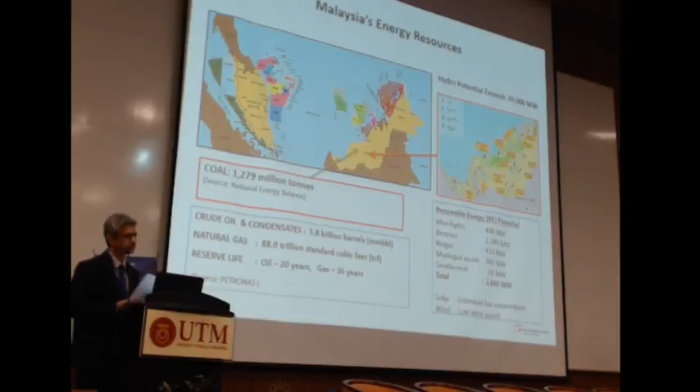So basically, as I will show at the beginning of my presentation, this shows our blessing, hopefully not a curse, that we are quite blessed with energy resources, of course mostly fossil fuel based resources. Coal, about 1,279 million tons, mostly in Sarawak and some in Sabah. At the rate of our coal consumption in the coal sector at the moment, maybe it can last over 40 years or so. Of course, the coal is low quality, and located in remote areas in Sarawak, and because of that we really use very little of our coal. Most of our coal is imported.

And then we have, of course, crude oil and natural gas, and if you look at the reserve life, it's about 20 years for oil and 36 years for gas. And we have a substantial reserve for hydro, in terms of hydro potential exceeding 20,000 megawatts mostly in Sarawak, and I think Sarawak is really harnessing the hydro to supply power to their population and to spur the development of the Sarawak economy, as we all know, based on the SCORE platform, sustainable energy-based development in the Samalaju area.

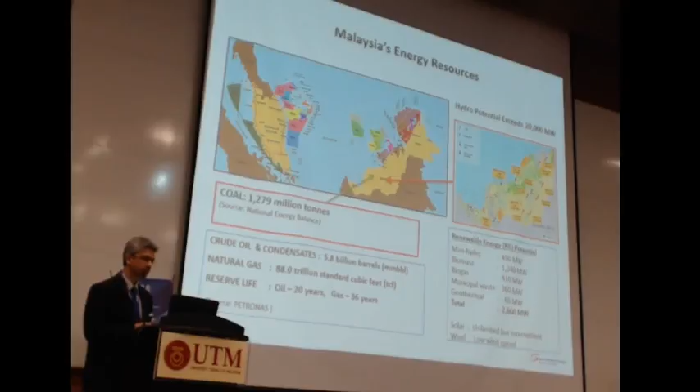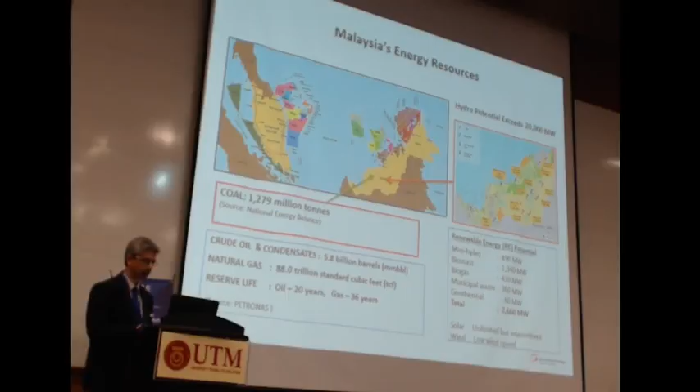Of course, we have not much wind resource because of our location in the equatorial belt, maybe a bit in the northern part of Sabah. So these are some of our resources available to us in trying to help us meet our energy demand. Of course, ocean energy is not in the list yet, but maybe we can add to that list after OTEC comes out with firm numbers on the resource capacity.

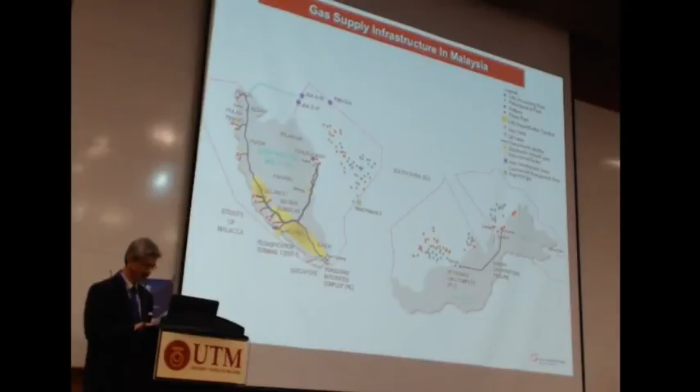Since the late or middle 80s, government has embarked on this program to harness our gas resources to develop our economy, and we have since then developed our supply infrastructure as shown on the map slide here, in West Malaysia and also East Malaysia.

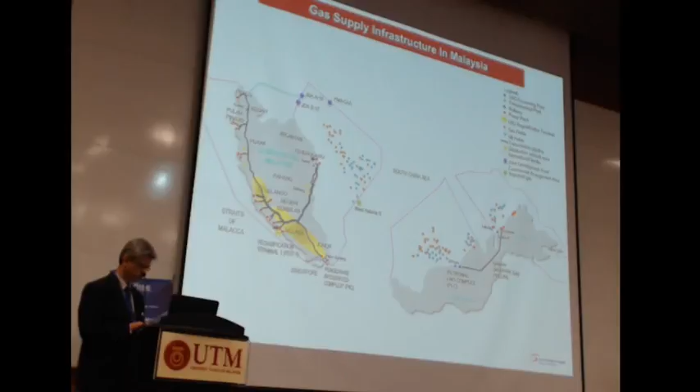And we export quite a bit of our gas as well, besides local consumption, as shown just now through our supply resources, supply infrastructure.

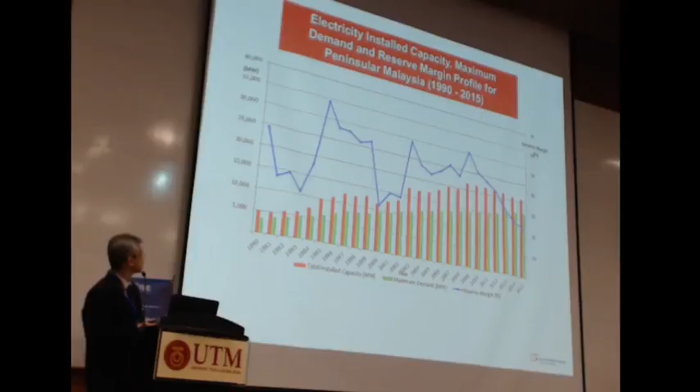The blue line shows our reserve margin. We need to manage the reserve margin so that we can prevent unforeseen interruptions in the supply of electricity through the reserve margin for planned and unplanned shutdown of the generators. But the problem is the higher the reserve margin is, it translates into more expensive system costs. So we try to optimize the reserve margin. And alhamdulillah, at the end of last year, our reserve margin was more or less optimum at about 24% or so, as compared to nearly 60% in 1995.

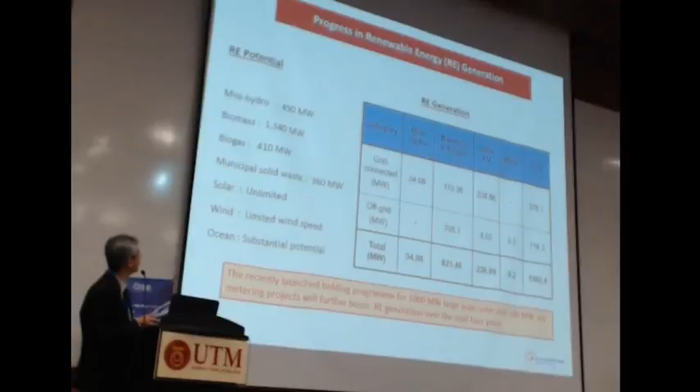As far as REs are concerned, if you look at the grid connected and the off-grid - I think there's a paper afterwards on this - we have mini hydros about 34 megawatts, biomass and biogas 110, solar about 228. So total grid connected is about 376 megawatts.

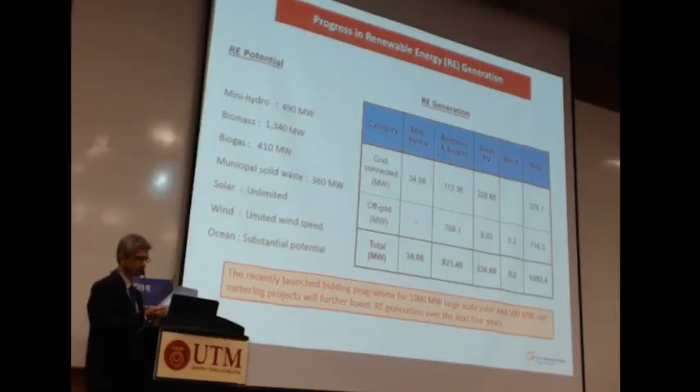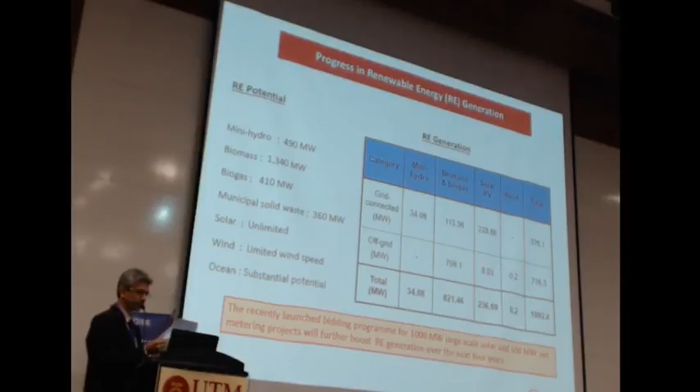Off grid, if you look at the palm oil mills for instance, about 700 plus megawatts being generated from biomass and biogas. We have solar about 8, and a bit of wind, about 0.2 - maybe they're no longer working now. Total about 716 megawatts. So all in all, total over 1,000 megawatts of RE generation.

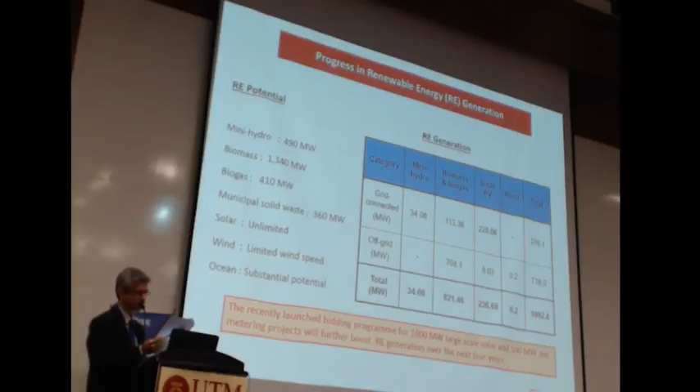Of course, I added the ocean potential at the bottom there. As Dr. Bakar has always said to me, we have substantial potential, and hopefully we can start harnessing it soon, spearheaded by UTM OTEC of course.

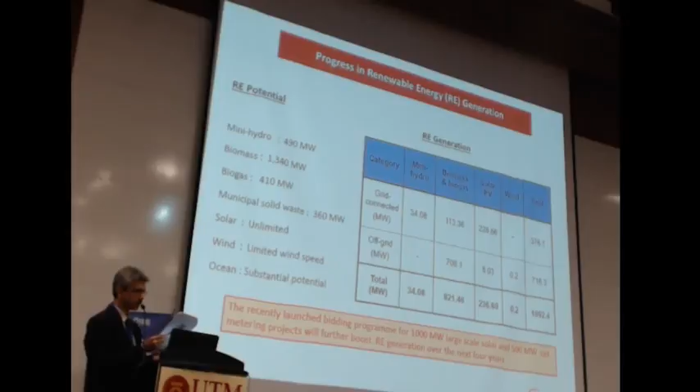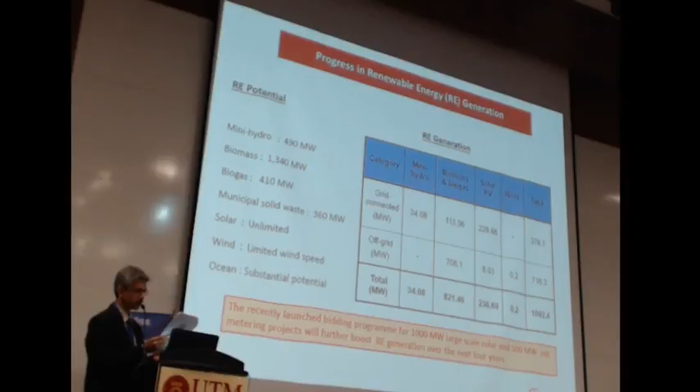But the good news is, as mentioned at the bottom, the recently launched bidding program for 1,000 megawatt plus large scale solar, and also 500 megawatt net metering projects, will further boost RE generation over the next 4 years.

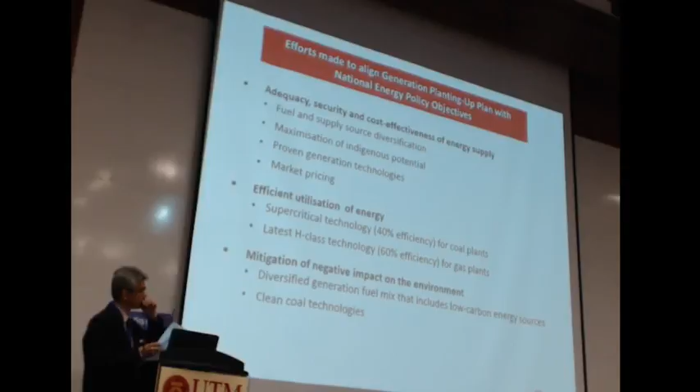So if you look at our historical mix trend as well as the option in the plan I presented, basically what we try to do is align the generation planting-up plan with national energy policy objectives. As you all know, we have basically 3 objectives. Firstly, to ensure adequacy, security and cost effectiveness of energy supply.

This we try to achieve through fuel and supply source diversification, maximization of indigenous potential, proven generation technologies, and going into a market pricing regime.

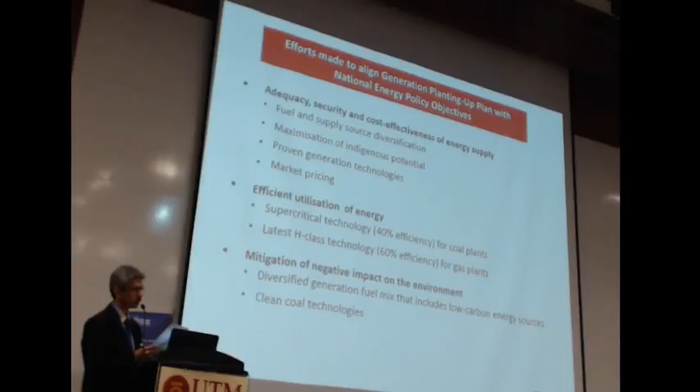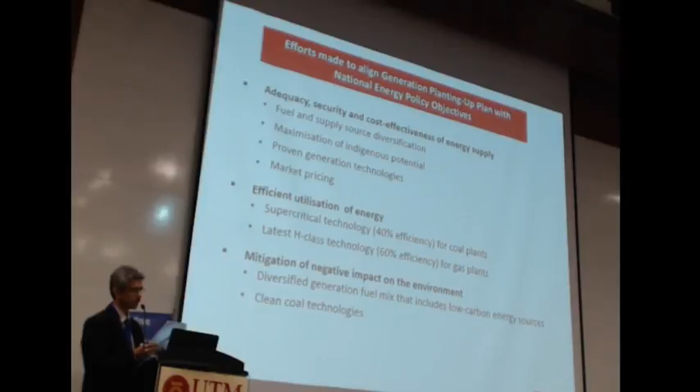Second objective, efficient utilization of energy. We try to include as many plants as possible that are state of the art in terms of efficiency, like supercritical technology, which can achieve 40% efficiency for coal plants, and the latest H-class technology, which can achieve 60% efficiency for gas plants.

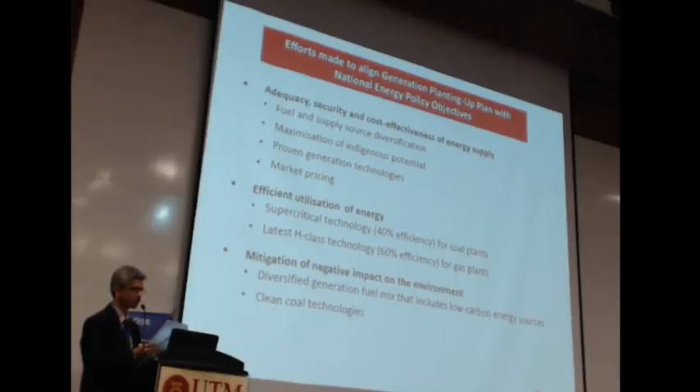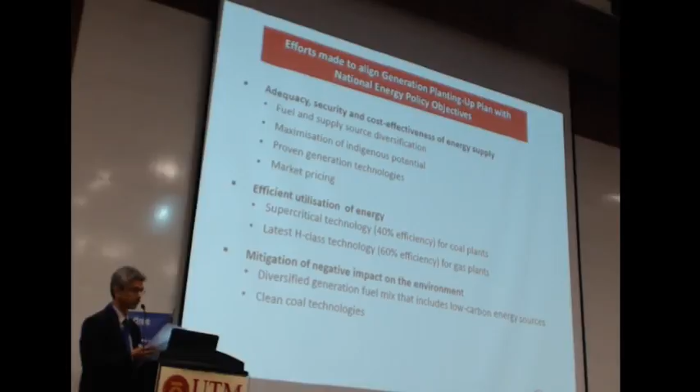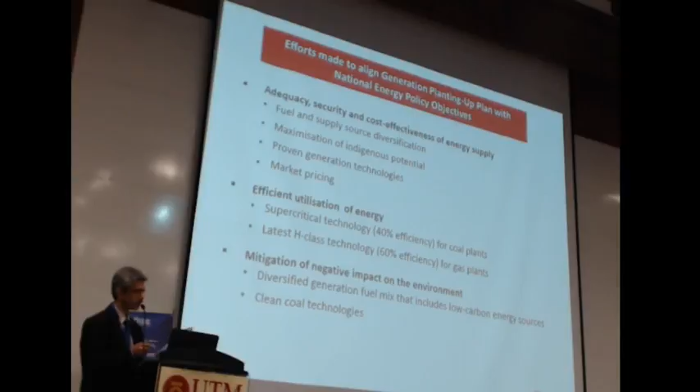We also strive to mitigate negative impact on the environment through diversified generation fuel mix that includes low carbon resources - of course not too successful - and we also include clean coal technologies. But the bottom line is basically we want to minimize system generation costs. So we have constraints here and there, and at the end of the day we really cannot go all out to satisfy any particular criteria as listed here.

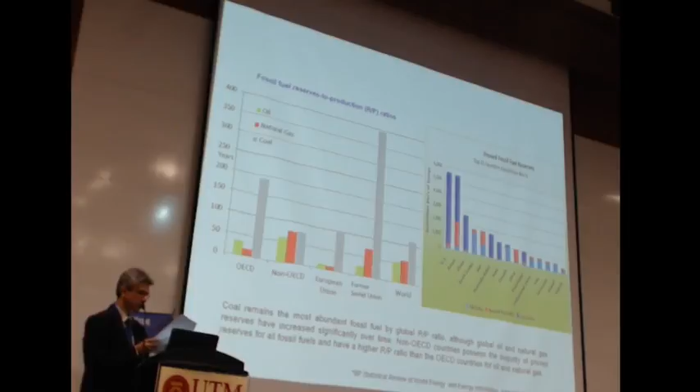Gas can last about 50 to 60 years, and oil about 50 years. Of course, this is conventional gas - it does not include the potential for shale gas. So if you include shale gas potential, the gas potential can exceed, maybe reach until 200 years or so. That's what they say.

So basically, the countries exporting energy, or rather producing energy, led by the US, Russia, China, Saudi Arabia - Malaysia is not in that list. That basically reflects the relative quantum of resources we have. But the geopolitical aspect has to be looked into when we decide what to do in the future.

One challenge we'll be facing is that securing more coal supply will be more challenging in the future. We are now importing about 20 million tonnes per year of coal for the power sector, but by 2040, or 2030, or maybe even 2025, we will be importing over 40 million tonnes, double that amount. We have to compete with other countries in South Asia and Asia to import coal, and this is going to be a big challenge.

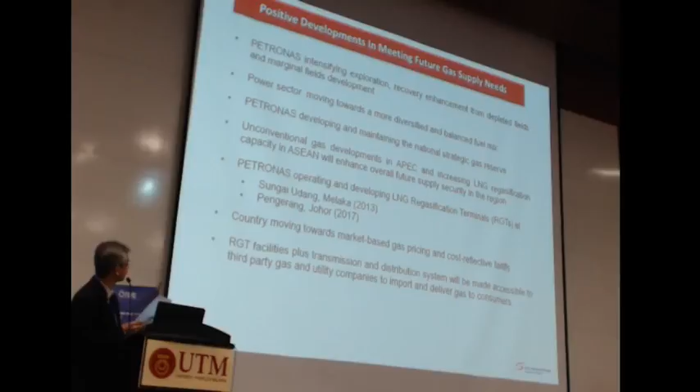But there are other positive developments for gas. Petronas has embarked on intensifying exploration, recovery, and enhancement from depleted fields and marginal fields. I shall not go through the full list, but on the slide there is the gas terminal we developed for Pengerang, to be commissioned in 2017. That will give us another option to import gas from the LNG market, and we are moving to market-based pricing.

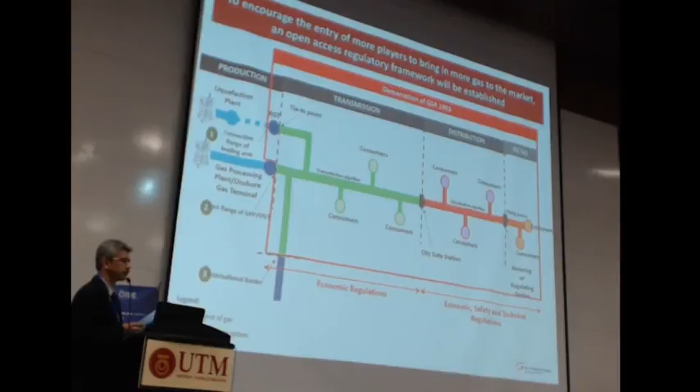In fact, the Parliament, Dewan Rakyat, has already approved our bill to embark on a third-party open access regulatory framework, enabling market participants other than Petronas and Gas Malaysia to bring in gas and use the infrastructure to supply gas to end users. This is a game changer for Peninsular Malaysia, where we now have more players who can make use of the infrastructure in place to import and supply more gas to meet demand.

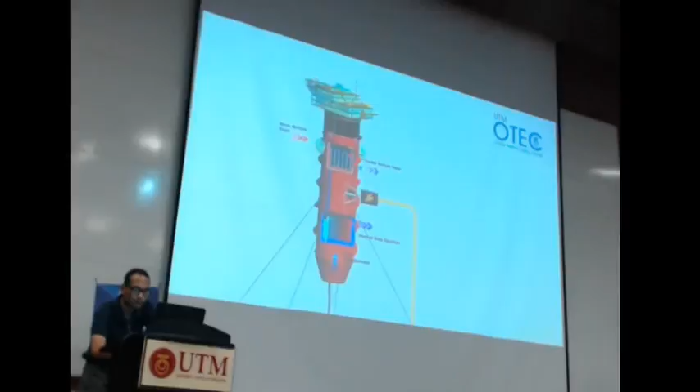The ocean offers the single largest opportunity for meeting our energy needs. 80% of the energy received from the sun is stored in the world's oceans. As long as the sun is there, we can harness the amount of heat stored in the upper layer of the ocean, ensuring our energy security. Ocean Thermal Energy Conversion, or OTEC, is the solution.

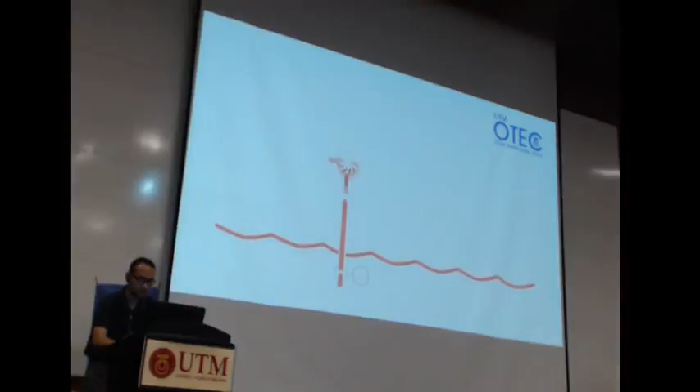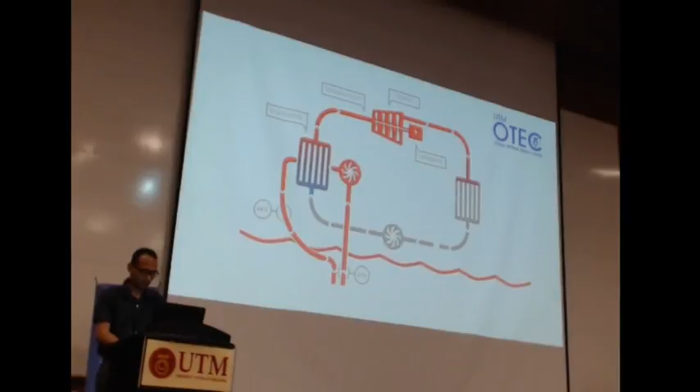OTEC works by processing the temperature difference between hot surface water and cold deep ocean water to produce energy. The process starts when warm surface water is used to boil a fluid, producing steam. The steam turns a turbine, generating electricity. Cold water from the ocean's depths condenses the steam back into liquid, completing the cycle. The advantage of OTEC is that it provides continuous, consistent baseload power.

There are many regions of the world that have OTEC resources, including Malaysia. We have discovered that we do have ocean thermal energy resources, especially in the deep waters of Sabah and Sarawak. UTM's Ocean Thermal Energy Center spearheads this initiative.

This center promotes not necessarily the research and development first, but our way of moving forward is to commercialize ocean thermal energy. Our main role is to promote private investment, and we will continue research to improve the existing technology.

OTEC offers various solutions with multiple applications. One of the energy carriers we are going to produce is hydrogen fuel, and hydrogen fuel will be the dominant energy carrier in the 21st century.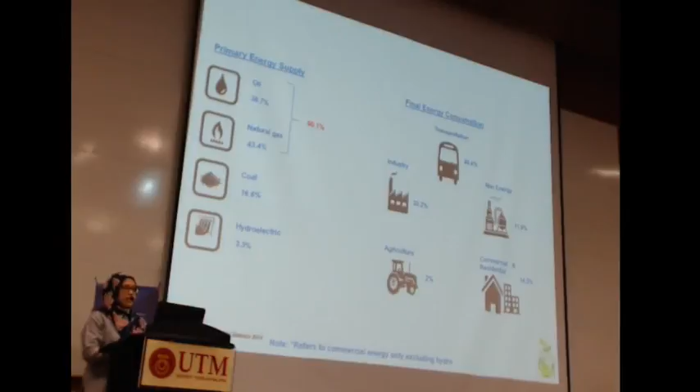I think Dr. Fauzi has elaborated at length in terms of information on energy demand and supply for the country. So from my side, I'll be sharing updates on RE initiatives and programs in the country.

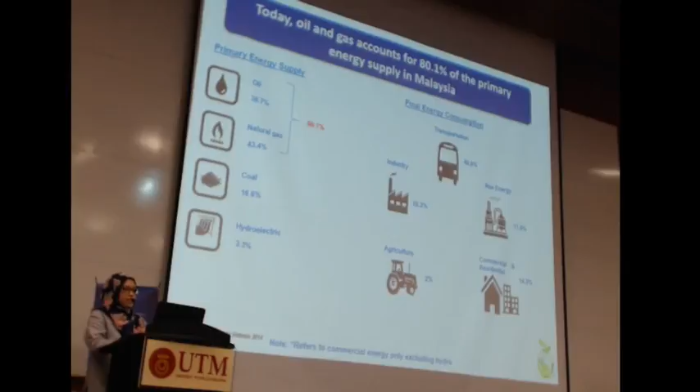Just to give a brief overview, but I think Dato' Fazil has elaborated at length on the energy situation in Malaysia. In terms of primary energy supply, oil and gas accounts for 80% of our primary energy supply. Renewable energy is negligible, as mentioned by Dato' Fazil just now, totally not in the picture.

But hydroelectric accounts for about 2.3%. Hydroelectric is considered as renewable energy pursuant to the redefinition of renewable energy in 2014, so the government has considered that hydroelectric, including large hydros, is part of renewable energy. In terms of final energy consumption, most of the consumption is actually coming from the transportation sector, followed by the industrial sector and others like non-energy, residential and commercial.

Just to bring you back on the history of overall energy policy in the country, especially focusing on renewable energy. The government launched our national energy policy in 1979 with three objectives: the supply objective, to ensure adequate, secure, and cost-effective energy supply; the utilization objective, to ensure efficient utilization is promoted; and the most important, the environmental objective, to ensure minimized negative impacts to the environment.

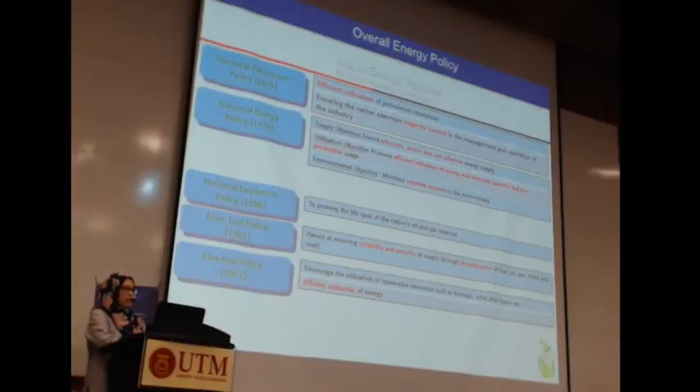Then the national depletion policy was introduced in 1980 to prolong the lifespan of our nation's oil and gas reserves. In 1981, the four fuel policy was introduced, aimed at ensuring reliability and security. Then in 2001, the five fuel policy was introduced, of which RE is considered one, to encourage utilization of renewable resources available abundantly in the country, especially solar, biomass, small hydro, as well as biogas.

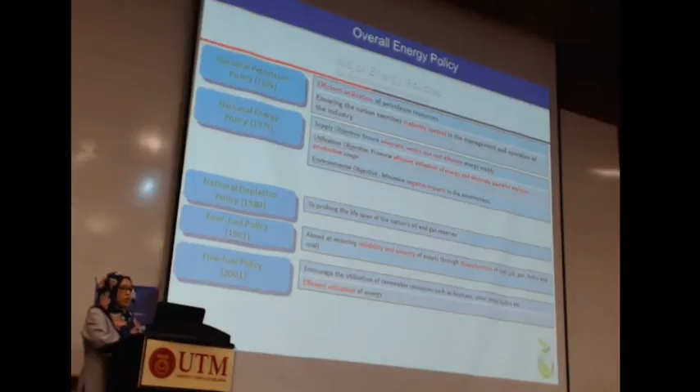Focusing on renewable energy development alone, the country started efforts and initiatives in renewable energy way back during the Malaysia Plan, about 15 years ago. At that time RE was introduced as the fifth fuel, and the target was set at 5% of the energy mix. However, we were not able to achieve the target that we had set.

Then again, in the Malaysia Plan 2006 to 2010, the target was revised, but instead of a percentage value we put numbers - 350 megawatt for the whole country, including Sabah. But by the end of 2010, only 61.2 megawatt was connected, exporting to the grid. Again, we didn't achieve whatever target we had put previously.

Then in the Malaysia Plan 2011-2015, the feed-in tariff was introduced - our RE Act was gazetted end of 2011, and now we are in its fifth year. As at 2015, the number was only 332 megawatt installed capacity of RE. Still, 332 megawatt is very negligible, like Dato' Fazil mentioned, that's the reason why it wasn't on any of our radar in terms of electricity generation for the country.

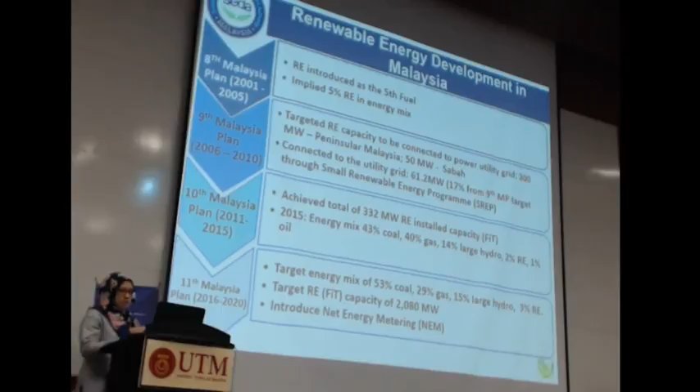This is our National RE Policy and Action Plan, way back in 2010, so it's already 5 years old and we're in the process of revising the figures and numbers because the data is totally outdated. However, looking back at the whole strategic thrust, it covers all angles, including our legal and regulatory framework.

Namely our RE Act and feed-in tariff, as well as the formation of Sustainable Energy Development Authority, and also looking into the conducive business environment for RE. Not to forget human capital development - that is very important, so that we do not rely on experts from abroad. We should have our own pool of resources so that we are able to operate and maintain our own RE power plants in the country.

Strategic thrust is to look into enhancing RE research and development. This is an area we shouldn't forget. And also finally, creating public awareness and advocacy programs is important to ensure that, especially the youngsters, are educated from an early stage.

This is the target in terms of RE electricity generation mix. By 2015, where are we? The target is we are supposed to be at 985 megawatts or 5.5% of generation mix, but as I mentioned, we are only at 332, only one third of our target. Again, we failed to achieve whatever we set during the Tenth Malaysia Plan. What happened to Malaysia? Why are we not able to achieve the target we set?

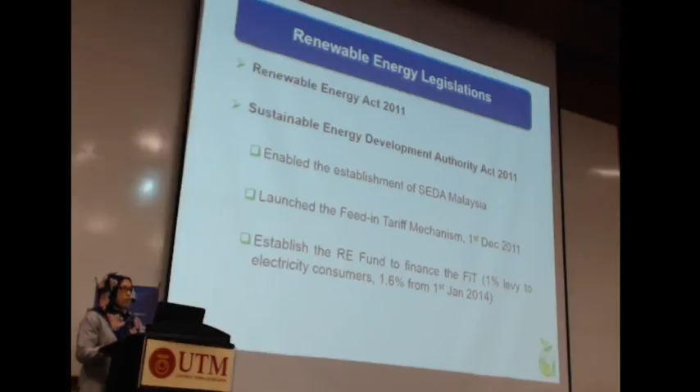How you can participate is by installing a solar PV system at your own house premises. You can sell your energy to the utility and you will be paid at a premium rate. The payment for the FIT actually comes from the electricity end users, including each and every one of us. So a 1% levy was charged on top of the electricity bill, and it was increased to 1.6% since 1st January 2014.

If you look at your electricity bill, you can see there's a line item for KWTBB, Kumpulan Wang Tenaga Boleh Baru. You are actually contributing to this RE fund. So indirectly, we are promoting and contributing to green energy generation for the country.

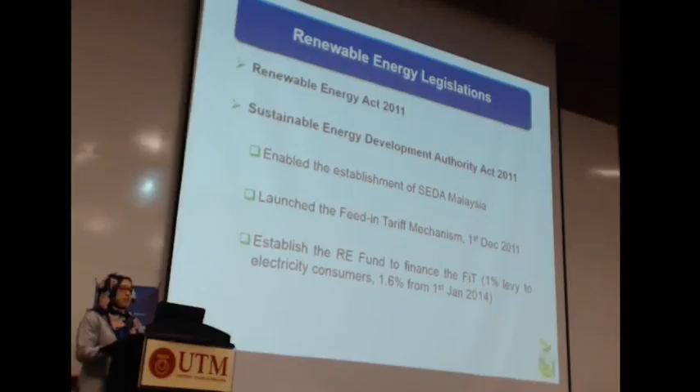These are the eligible RE resources for the feed-in tariff scheme: biomass, biogas, hydro, solar PV, as well as geothermal. Geothermal was included in December 2013. Wind is not there yet, and OTEC is not there yet. It is always important that any RE eligible in our FIT scheme has to be commercially and technically viable, so that banks are confident to provide financing to the RE project.

Biomass in Malaysia mainly comes from empty fruit bunches as well as municipal solid waste. Biogas mainly comes from palm oil mill effluent from palm oil millers, and also landfill gas. Small hydro is capped at not more than 30 megawatts maximum; more than that, you are not eligible to participate under this FIT scheme.

Solar PV, I think among all technologies, has been the technology which is like a hot cake—it's in very good demand. Whenever you release the quota, it is all gone within less than an hour. Maybe I can share with you afterwards the reasons, and about the rest, which are slow moving—the take-up rate is not as good as solar PV.

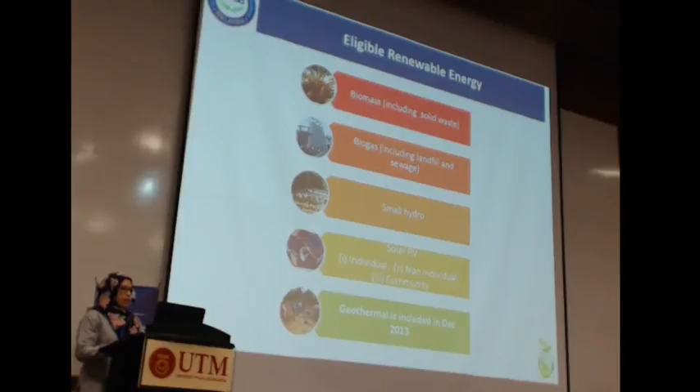This is the rates effective from January 2016. You can refer to our website—it is real time and online. Whenever we revise the rates, it will be reflected accordingly.

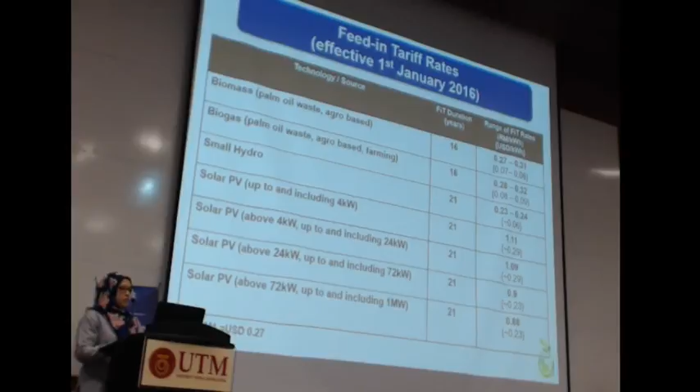FIT duration refers to the power purchase agreement. For example, biomass and biogas have an effective power purchase agreement of 16 years. Small hydro and solar PV are 21 years. So you can sell your energy to the utility at the fixed rate for this prescribed duration.

Okay, this is our status as at December. As I mentioned, we're only one-third of our target of 985 megawatts by 2015.

Biogas operational power plants is only about 18 megawatts. This is actually exporting to the grid and connected. Those off-grid are not included in this figure. Biomass 75 megawatts, small hydro 18 megawatts. Small hydro is still less than 30 megawatts, not including the large ones. Solar PV, 221 megawatts.

If you compare these four technologies in terms of numbers, solar PV has the mass, because solar PV is always like household 4 kilowatt, 10 kilowatt, 12 kilowatt, commercial 200 to 400 kilowatt - small, but the mass is there. But for biomass and biogas, we manage to get 1 or 2 projects which then contribute to the amount. For example, biomass is normally about 8 to 12 megawatt sizes, biogas 1 to 2 megawatt sizes.

But there are actually a few other barriers we need to look into on other REs. For example, for biomass it's always an issue of feedstock - securing long-term supply is not possible. Getting the feedstock, the contract is always on a 3-year basis, so anytime you want to renew the contract, there's an increase in your feedstock supply cost. Biogas initially had an issue of interconnection, since it's very remote.

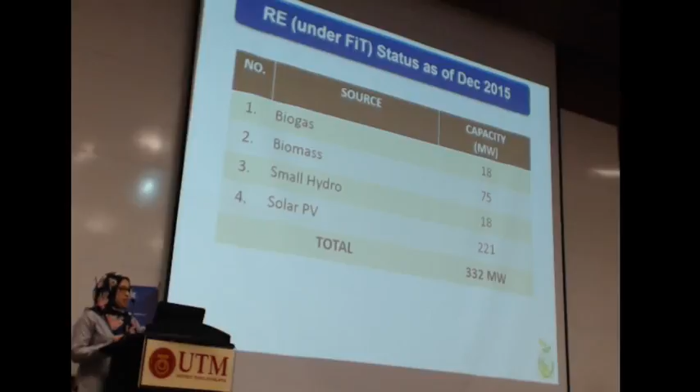So we cannot, I would say, interfere. This is actually a major barrier faced by small hydro players in the country.

Human capital and training, as I mentioned before, is very important. In SEDA, we have put much focus in the beginning on developing various courses on solar PV. The reason being, among all four technologies, solar PV is the easiest - it's like plug and play. You can buy the main components off the shelf and assemble them, then straight away generate, compared to other renewable energy. Another reason we've focused so much on solar PV is because of the numbers.

As at today, we have approved about 5,000 houses with solar PV projects, ranging between 4 to 12 kilowatt systems each, but as at today, about 2,000 plus are in operation and running. You can see it in Kuala Lumpur, Selangor, Johor, Penang, Kedah - they're growing. Except for Kelantan and Terengganu, you don't see much in that area still, but in the rest of the states you can see many houses have installed solar PV.

These are among the solar PV courses we've come up with, covering designing, installation and maintenance, as well as off-grid solar PV systems.

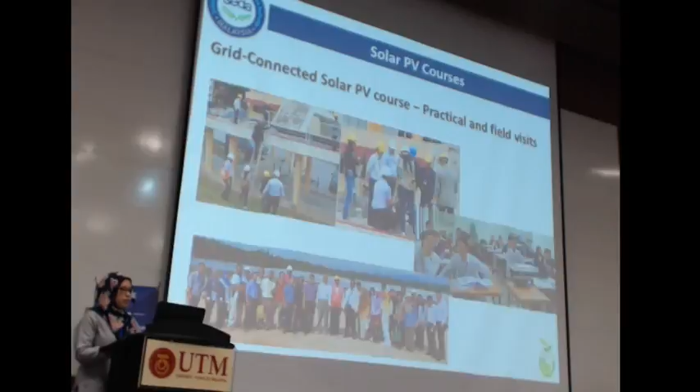These show some practical and field visits available in our solar PV courses and trainings. We provide courses at ASEAN level since 2013 because Malaysia is advanced in terms of solar PV capacity building, trainings, as well as the standards and guidelines available for the country.

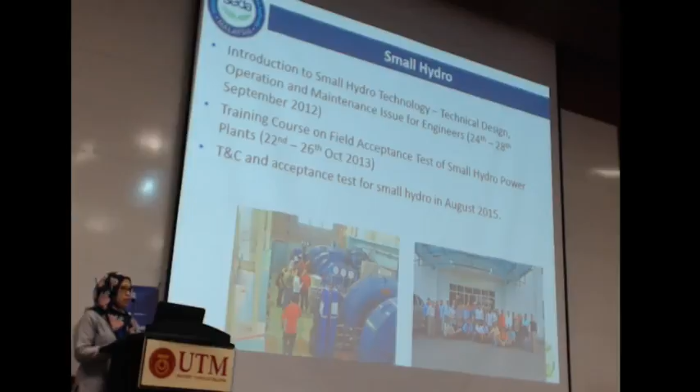Okay, this is about one. We do provide other training for small hydro too - it all depends on the needs and priorities of our developers, then we develop the course based on their needs, for biogas as well.

In terms of EE trainings, yes, SEDA also provides trainings on energy efficiency in aircon and mechanical ventilation systems, energy management in buildings, energy audit, as well as principal application compliance with MS 1525, the code of practice for EE in non-commercial, non-residential buildings.

Okay, RE way forward - I think Dato' Fauzi has also mentioned this. End of last year, the Planning and Implementation Committee approved a new mechanism on RE. This is somehow to compensate for the loss of numbers we were supposed to achieve. We only achieved one-third of our target in 2015, and we're still very far from reaching our 2 gigawatt target by 2020. So what do we do?

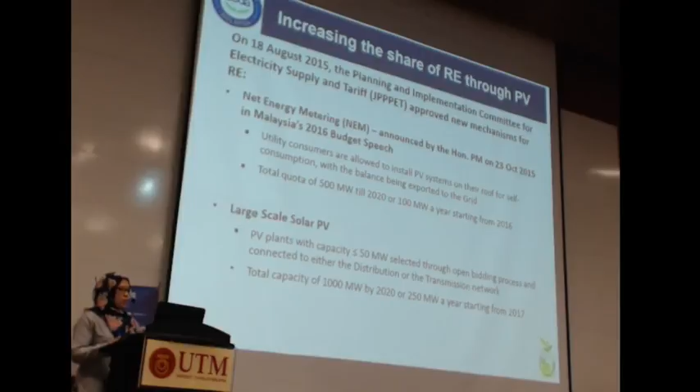Based on our past experience, solar PV has been progressing very fast compared to the rest. That's why the government came up with a program called Net Energy Metering, announced by our Honourable Prime Minister on 23rd October 2015 under the 2016 budget. A total quota of 500 megawatts will be offered starting this year until 2020 for whoever is interested to install solar PV and participate in this program. But the main focus is for solar self-consumption - whenever you have export, you can export it to the grid at a certain rate.

Another one we call large scale solar. This is meant for large scale systems, as small as 1 megawatt up to 50 megawatt maximum, exporting to the grid. Total capacity is 1000 megawatts by 2020, and this program will start in 2017. So at least we have an additional 1.5 gigawatts within this 5-year period. We hope we can fill the hole and achieve our 2 gigawatt target by 2020.

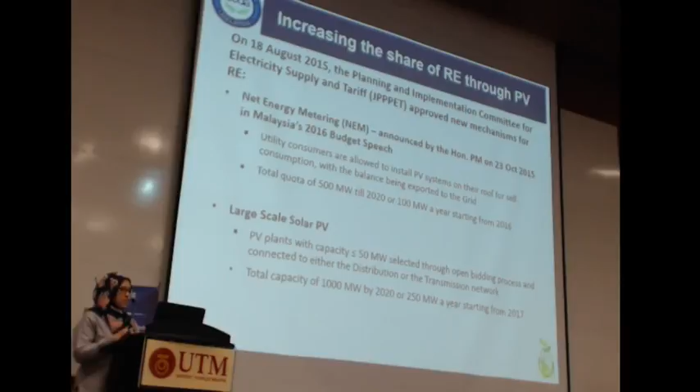But bear in mind, even if we achieve our 2 gigawatts by 2020, we are planting up more power plants progressively, but because of RE, the progress is very slow. We can never catch up because our maximum demand is increasing. We're planting more power plants, but RE is still there - it's available, abundantly available in the country. It's eligible, but like Dato' Pakai just mentioned, it's eligible but negligible.

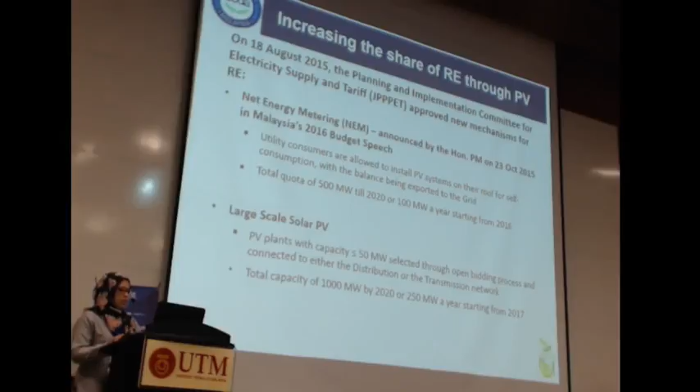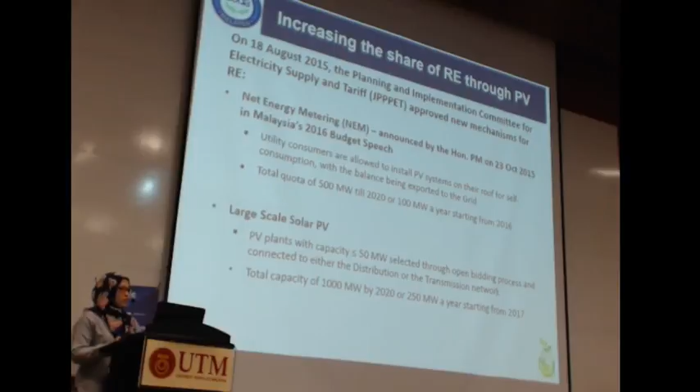We at SEDA Malaysia are struggling hard to promote this, but based on other countries in the world, it all goes back to policy. The government needs to be very strong, pushing for it - only then can it move forward. But in terms of the Malaysian public, I would say they are accepting of this RE program.

So this is the quota recently launched in 2016 - the amount of quota for solar PV under the net metering and large-scale solar programs.

Okay, other incentives available in the country: the Green Tech Financing Scheme, available until 2017, where the government will bear 2% of the total interest rate or profit charges by private financial institutions, for financing sizes up to 50 million per company, implemented by Malaysia Green Tech Corporation. Also, the government announced Green Investment Tax Allowance and Green Investment Tax Exemption, applicable from 2016 until 2020, where certified green products under MyHIJAU Directory, and certified companies providing services in the green sector, can apply for these incentives. The implementing agency is MIDA Malaysia - if you need information, you can always go to their website to explore more.

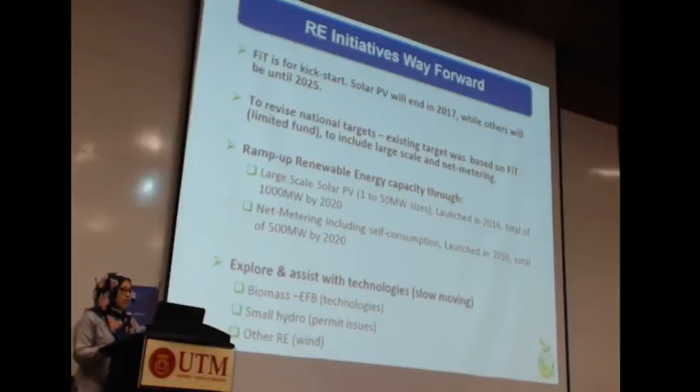As I mentioned, in terms of way forward, FIT is just to kickstart - it cannot be there forever. The end users, the public, cannot be contributing to the RE fund forever. It's just not fair to the public. That's why FIT is actually meant to kickstart the whole RE program in the country.

For the past 5 years, we can see that the system price has actually gone down, especially for solar PV. It is now reachable at the public general level. For example, with FIT, by the 5th to 6th year, you can actually recover your capex. But without feed-in tariffs, the payback period is still very long, about 11 to 12 years - still not yet attractive.

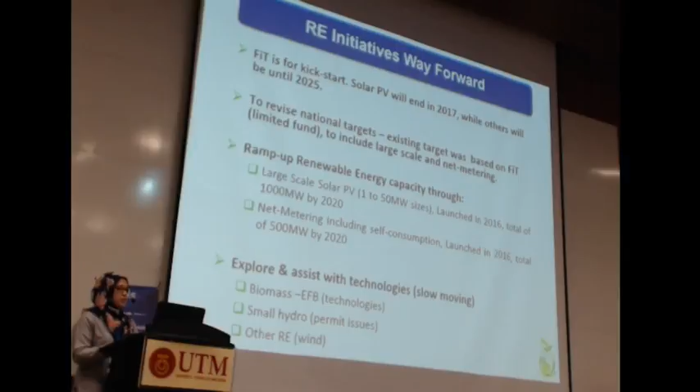For the commercial industrial sector, with investment tax allowance, they can actually still recover their payback in 8 to 10 years, which is attractive to the commercial industrial sector. This is where net metering takers will mainly be coming from this commercial industry, not so much from the public. From the public, with the current energy price, the payback will still take very long.

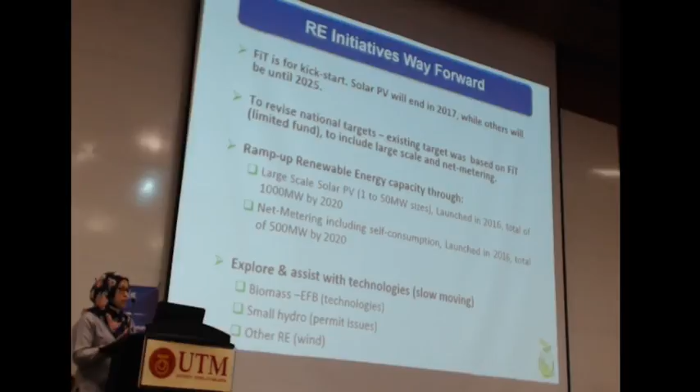As I mentioned, we are in the process of revising our national targets. Our policy action plan is already 5 years old, so we need to revise the target and look at the way forward, and also encourage more other RE to be in place. This will include geothermal as well as wind, and ramping up RE capacity, as I mentioned, and also biomass. The technical potential is huge, but it's slow moving. So this is the area we need to look into to assist.

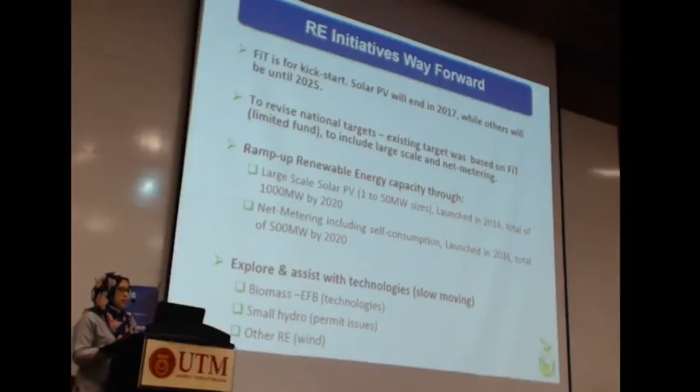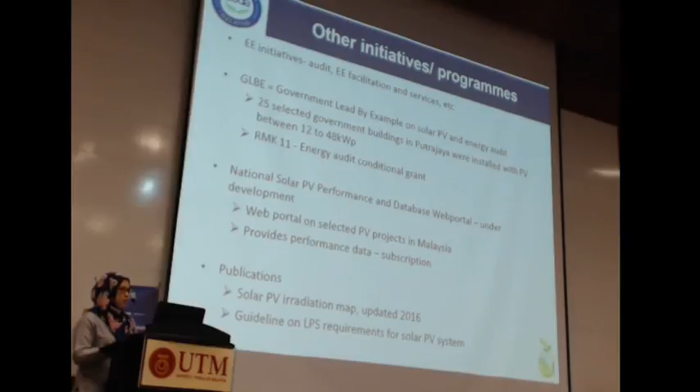Other initiative programs as mentioned: we do provide energy audit activities, EE facilitation services, and also other projects like for government, for example, energy audit. On the RMK level, there's an energy audit conditional grant available. We are also developing our national solar PV performance and database web portal. It's under development, where all PV systems from medium-sized scale will be monitored by SEDA Malaysia and made available so the public can view and see what and where PV systems are available in the country, and what the performance is like.

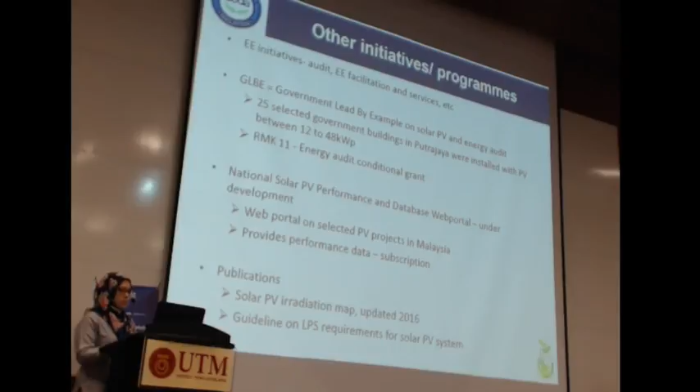And publications: we do provide other publications, for example the irradiation map, updated. We recently launched these publications early this year, and also a guideline on lightning protection system requirements for solar PV, and a few other publications available within SEDA Malaysia. That's all, thank you.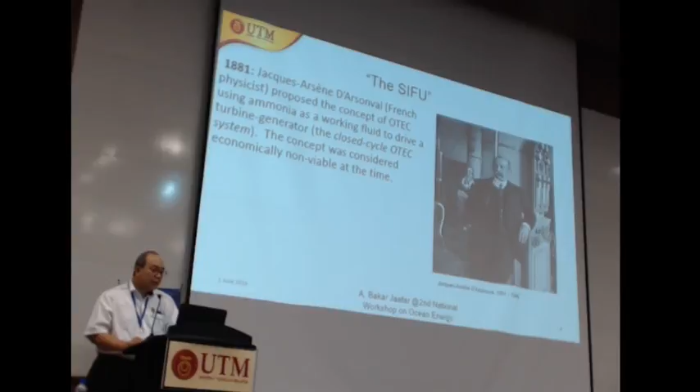When Professor Ikegami from Japan made the presentation in Malacca in February 2012, I said to him, you're right, Professor Ikegami, this scientist discovered this knowledge, but this knowledge was revealed to us 1,414 years ago. We Muslims appreciate Surah An-Nur, verse 40.

This verse says there is total darkness in the deep sea, and above that there is a current, above which there is a wave, above which is a cloud. There is a dark portion and a lit portion. The OTEC metaphor comes from the fact that if one were to stretch one's arm through the lit portion,

till one cannot see his arm anymore. That's the metaphor for OTEC, the differential of temperature between the upper part of the ocean and the deep, dark ocean.

Now, of course, the last two verses come into the Aqidah. If one is not given any light, there should be no light for him.

To illustrate what has been revealed: the energy from the sun goes through the water, air particles become wind, water particles become clouds and rain, and the rest of the energy hits the water surface creating waves. The energy goes through the current to the upper layer of the deep water, creating oceanic currents. The light can only penetrate to certain depths, beyond which is total darkness.

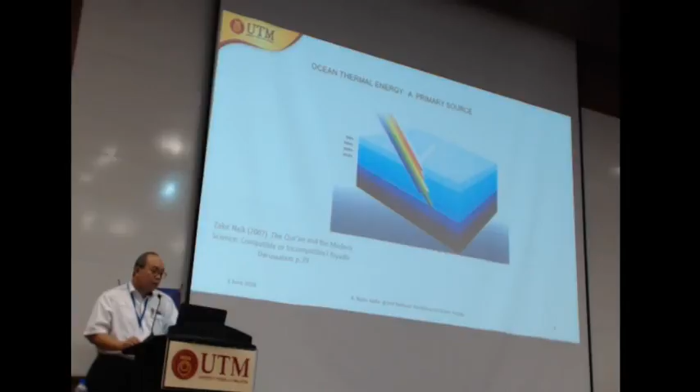This is the science, the physics behind this. Light from the sun can penetrate the waters up to 300 meters, beyond which is total darkness.

So the best definition for ocean thermal energy is a method of converting part of the heat from the sun stored in the surface layers of a body of water into electrical energy. If nobody wants to take up this power, we will simply convert the electrical energy into an equivalent energy product.

What we mean by this includes hydrogen fuel. I would say this is about the best definition I've seen in the world, and it's captured in US law from 1980 on ocean thermal energy.

As mentioned in the video, the technique of OTEC essentially uses a working fluid—in this case, ammonia is best for the time being. The moment ammonia is exposed to warm water, it becomes gas, and this gas is used to turn the turbine and the generator, and that's how we get electricity. If nobody wants electricity, we can introduce an electrolyzer at the end to produce hydrogen.

Now the trick is how to convert this gas back to liquid. That's the reason we need cold water from the deep sea—this cold water condenses the gas back to liquid, and that's how we keep circulating the liquid, continuing to extract heat from the upper layer of the deep waters.

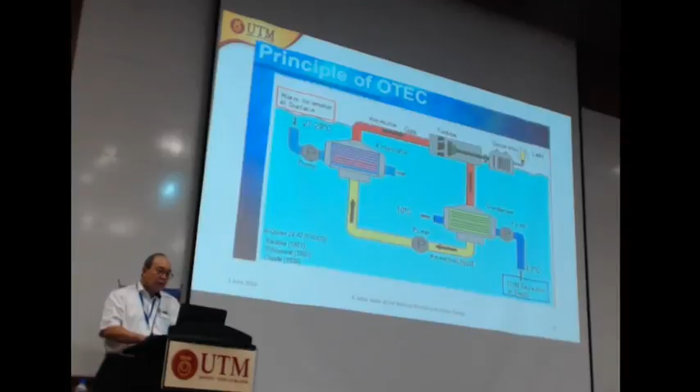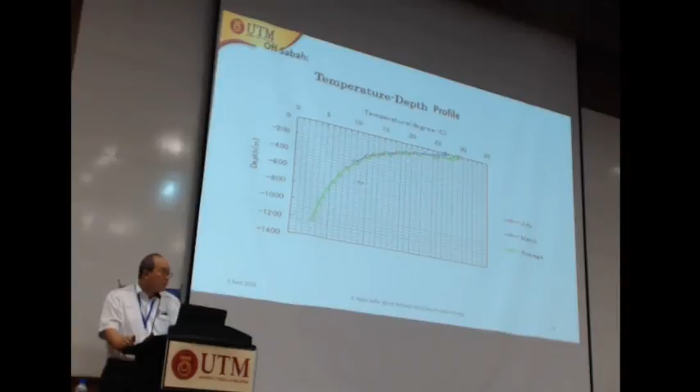So I think we cannot extract the heat, cannot get the best temperature differential of 20 degrees in shallow waters. So in Peninsular Malaysia, we don't have that potential unless we improve the current technology.

What will be the benefits for many countries? I would say energy security. This has already been mentioned by the Energy Commissioner. It's a very important aspect - energy security, food security, water security, and even cyber security.

In terms of biodiversity, we don't know much about the flora and fauna of the deep waters, so we need to do more research. Also, promoting renewable energy is one response to mitigate climate change, because less carbon will be released to the atmosphere, and we will depend less on fossil fuels, the major source of air pollution. That's also highlighted in the video.

There are other medical and health benefits from utilization of ocean thermal energy. As highlighted in the video, our purpose of developing ocean thermal energy is really not so much to produce power to connect to the grid - it's so far away you can't connect to the grid - but to produce hydrogen that will fuel our future transportation. In terms of urbanization, with supply of hydrogen through fuel cells, and taking advantage of solar photovoltaics at the same time, I think we can go off grid.

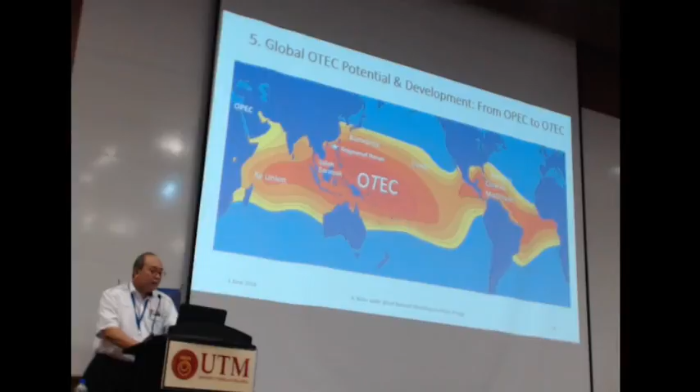Right, just now we were touching on hydrogen, the future energy. This is how we can find the resource. The radar shows where the potential is higher, and we are lucky that Sabah Sarawak is on the global map. In terms of economics, at first look, people might think that renewable energy infrastructure is not viable.

This illustrates the fact that although the capital for fossil fuel is very low, about $3-4 million per megawatt, you have to pay for the fuel, and the fuel keeps going up. The price of oil may drop slightly, but in the long run you have to pay more for fuel. For OTEC, although the capital is very high, about $8 million per megawatt, you don't have to pay for the fuel - it's free.

This capital cost - the economy of scale is very important. You can reduce the generation cost by building a bigger plant. If you look at the energy cost alone, you might think OTEC is not viable, but simple economics shows that if a single OTEC plant produces spin-off products, you can also generate power at no cost.

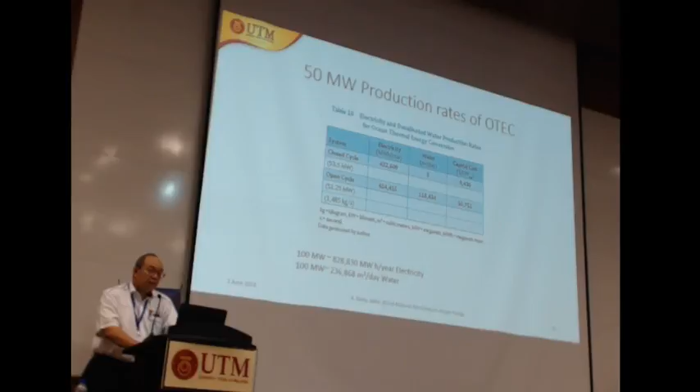Lately we have been requested to advise Brunei Darussalam - they're also looking at OTEC in Brunei. They have quite a bit of potential, about 6,000 megawatts. I think their installed capacity is less than 500 megawatts at the moment.

In Malaysia, in terms of potential, although Dato' Fauzi said this number is yet to be firmed up - to me it's very easy to firm up any numbers. We just spend 2 or 3 million, engage people like McKinsey or Boston Consulting or PwC, and maybe they will listen to them. If an academic says it, they say the number is not firmed up. So just give us 4 million and we'll firm up the number.

In fact, he did mention why ocean energy hasn't yet featured in Malaysia's energy projection - they say the numbers aren't firmed up. I had the opportunity to brief Pemandu on this subject, where they released chapter 6 on energy - they didn't capture ocean energy either. So this is one issue we need to take up with the authorities.

Why do you think the number isn't firmed up? Who has to firm up the number? It's a question of whether you engage the right person or the right authority. In Malaysia, with potential of 100,000 megawatts - the government may not allow us to exploit every inch of it, but if they allowed even 50% of the area for OTEC, the potential would be about 50,000 megawatts, which is double the current installed capacity.

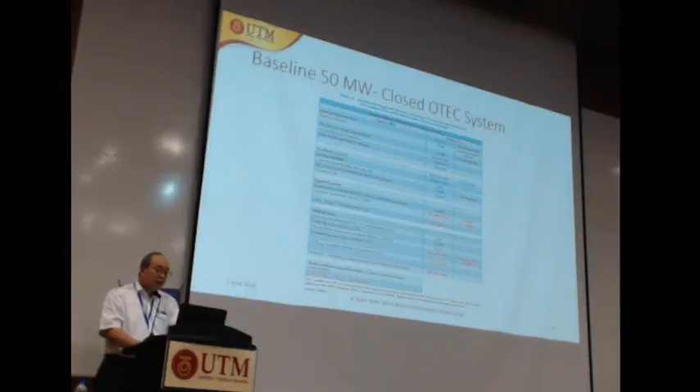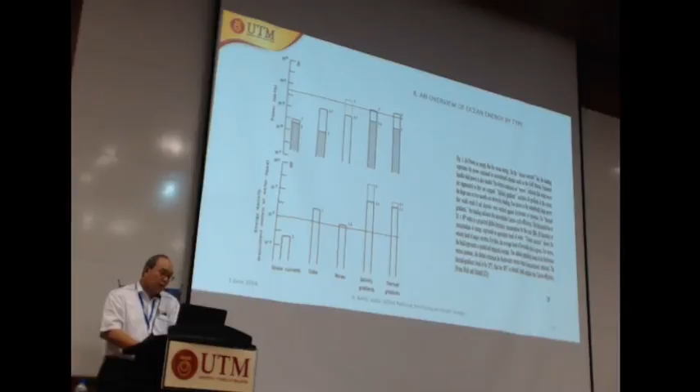Okay, so the way forward for ocean energy development in the tropics, I would rank this way, but this is an open-ended listing, subject to further study. Definitely OTEC is the largest, and next can be any one of them, depending on the time of day, depending on the year. But wave, I would certainly rank the lowest in the tropics. Of course, wave potential is higher in the temperate regions.

At the Academy of Science carbon-free energy workshop held in April last year, we made some projection of how much OTEC can be developed. This is still a projection, but the interesting part is the coincidence that the contribution of OTEC in overall energy generation in terms of electricity by 2050 is about 70%.

This is the same percentage presented by Dr. Fauzi, but he didn't say OTEC, he said ocean energy, he said renewable. By 2050, renewable will contribute about 70% of the total generation. I saw Prof. Wan Azhar just now also referred to the same figure, 70% by 2050, contributed by renewable, and by this projection, renewable will be more than 70%.

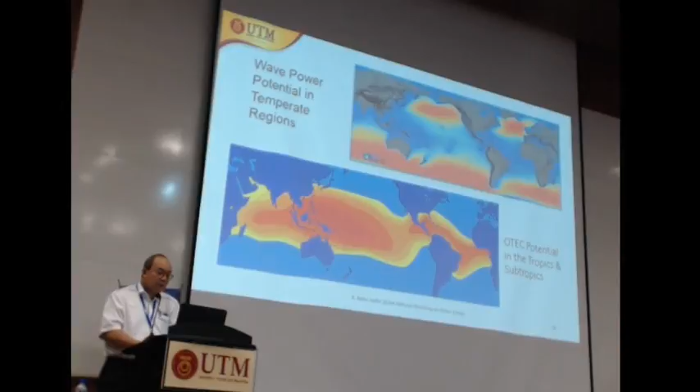So lately, people have been asking me, there's a bit of confusion about the terminology - what do you mean by clean energy, what do you mean by green energy, what do you mean by renewable energy. One thing very clear to me is that when you say clean energy, no CO2, so that includes nuclear. When you say green energy, it means no pollution except CO2. Renewable, of course, renewable. Sustainable means you can meet these three criteria. So OTEC is one of them. Anyway, this subject needs further refinement, but in general, there's so much confusion about these terminologies.